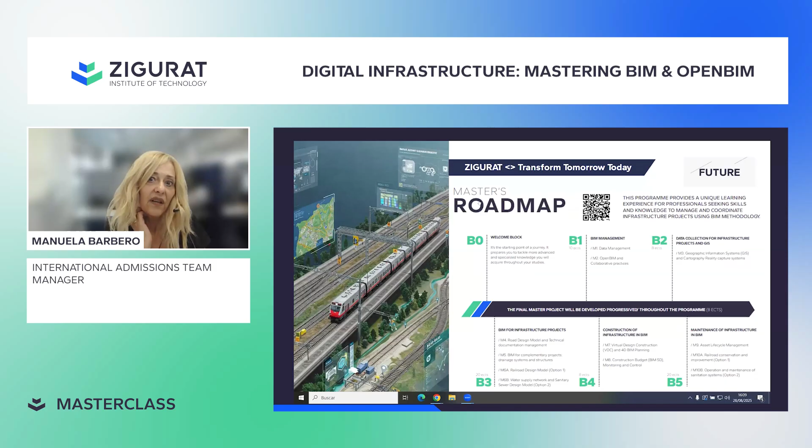In this part, we start to do virtual representation of the project, and later we'll talk better about the benefit. The last part of the master covers asset management, so we're talking about operation and maintenance. We'll check all the benefits of operation and maintenance regarding the road project and the specialization you are choosing. If you go to the next slide, we have an idea of the benefits you can get by joining this master program.

ZIGURAT is ranked as one of the top schools in the world in BIM. As Taisha told before, we started 24 years ago. In this program, we talk about BIM for Civil Engineering and GIS. We talk about cutting edge technology and knowledge because we apply new methodologies in infrastructure and GIS. We focus on data management, interoperability, and digital transformation. We talk about practical learning because we work on real projects and simulations.

This is your master final project that we will develop progressively through the entire program. Then we talk about flexibility and support. The program is structured for professional profiles, which means you can study and work at the same time. You have live online methodology, access to an advanced campus such as the Canvas platform, mentoring, and continuous academic and career support.

But you will also be involved in a global network, becoming part of the ZIGURAT alumni. You will be part of a community of more than 20,000 professionals from 120 different countries around the world. You have access to local hubs, student weeks, and executive networking.

If you go to the next slide, I'll talk about the specialization option, which is what I mentioned before. As part of the project, you can decide to add to your road project the part of water supply and sanitary sewer. So you can choose between different sectors for deeper expertise. It's career-oriented training because the program is designed to prepare you for roles such as BIM infrastructure manager, GIS consultant, head of technology, and much more.

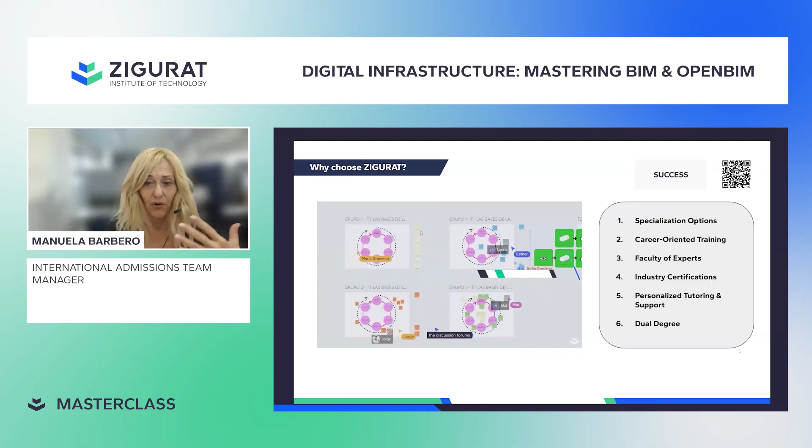It's a program that will give you a dual master degree because you can earn a double degree accredited by the University of Barcelona and ZIGURAT, recognized worldwide. Meanwhile, you will get official recognition from Autodesk and Bentley, validating technical proficiency while you use BIM tools. And as I mentioned before, now also from CIOB. Here's just an idea of what you're going to learn during the master program.

Now we give voice to two alumni who just finished the master, and they will introduce themselves. One of the two student alumni has been one of the best students, but both were part of the best project that we developed in the last edition. So congratulations to our alumni. I give them now the chance to speak better about the project, and of course, if you like, with pleasure, we will be here to provide you with more information. Thank you very much to everyone.

Thank you, Manuela. Thank you so much.

I would like to present Chakad and Dmitrii and talk a little about them before. Let me pass the presentation here. We are super proud to welcome two outstanding professionals who played a key role in the team behind the Final Master Project, awarded Best Final Master Project in the May 2024 edition of our Masters in Global BIM Management in Civil Engineering and GIS. Now it's my great pleasure to introduce our guest speakers: Dmitrii, who is a BIM Manager, Parametric Bridge Engineer, ZIGURAT alumni, and also ambassador, and Chakad, who is a land surveyor, BIM and construction management expert, and also a ZIGURAT alumni.

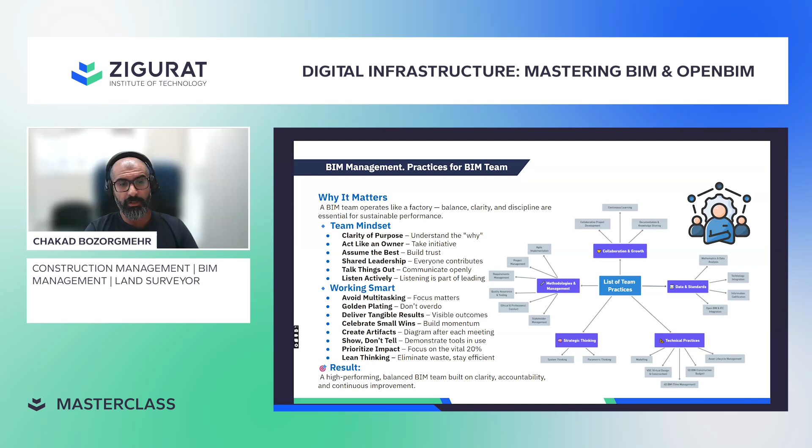Practice for BIM team. As BIM is about sharing information and managing integration, the team also needs a strong understanding of how to share and integrate efficiently. It's not just about the tools for the models, but about the people behind them. A successful BIM team builds trust, communicates openly, and takes responsibility for their role while respecting others. When everyone contributes and listens, collaboration becomes natural. Problems are solved faster, and the flow of information stays clear and reliable. This mindset is what turns BIM from a technical process into a culture of teamwork, accountability, and continuous improvement.

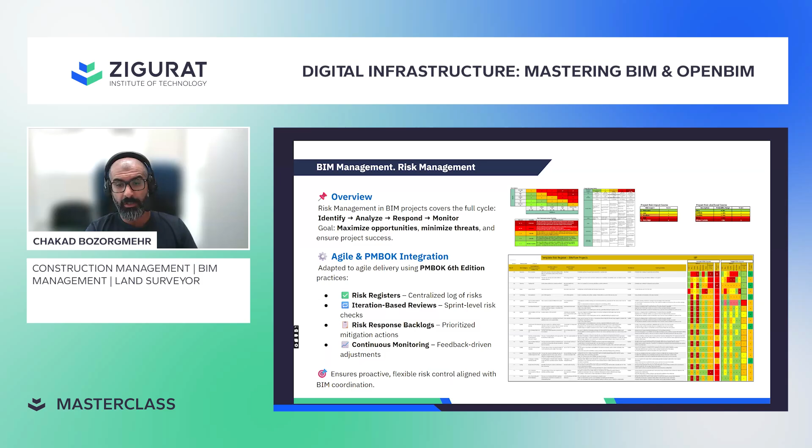Risk management. Risk management in BIM projects follows a full lifecycle of identifying, analyzing, responding to, and constantly monitoring risk. The real value here is not just documenting the risk, but also foreseeing how we should respond to them before they impact the project. As BIM methodologies and digital solutions continue to evolve rapidly, our risk management approach must adapt. This means shifting our focus not only on minimizing threats, but also on recognizing and maximizing the opportunities.

Opportunities such as automation tools or better data integration can significantly enhance project outcomes if we act on them early. In risk management, opportunities are handled with the same importance as threats, but responses focus on creating positive outcomes. We can exploit an opportunity to ensure it will happen, enhance it to increase its benefit, share it with a partner to minimize the burden, or accept it when it requires no action.

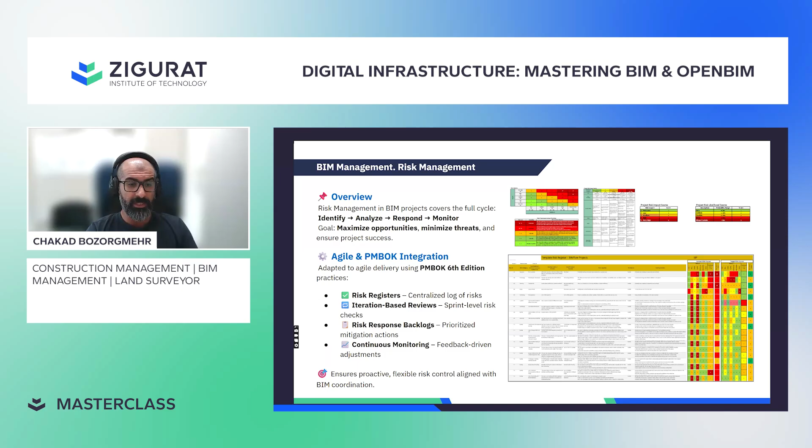Through tools like risk registers, iteration-based reviews, and continuous monitoring, we create a proactive system which ensures that risks are tracked, responses are prioritized, and adjustments are made in real time. In short, BIM risk management is not only about protecting the project from failure, but also about positioning the team to capture the opportunities that lead to greater success.

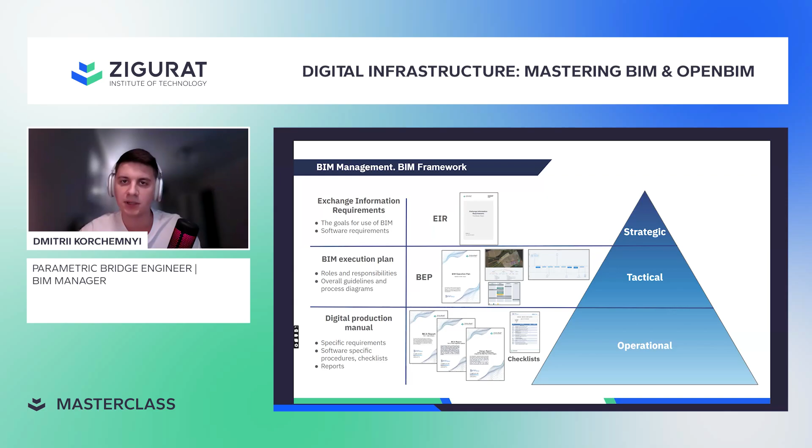And finally, at the operation level, we prepare production manuals, progress reports, and quality checklists. These tools make sure we apply BIM correctly and consistently across the project. So this structured process improves coordination, reduces mistakes, and helps us deliver the project more efficiently from start to finish.

BEP, BIM processes. BEP, BIM execution plan, is the main document in our project. It brings all team members together from the start by clearly explaining roles, tasks, workflows, and possible risks. This shared understanding helps make the project run more smoothly and saves time and money for the clients.

For our project, we created a BEP that includes all BIM uses. We created BPMN diagrams for each BIM use, clear visual diagrams that show the workflow step by step. This method supports teamwork and helps us manage risk throughout the project.

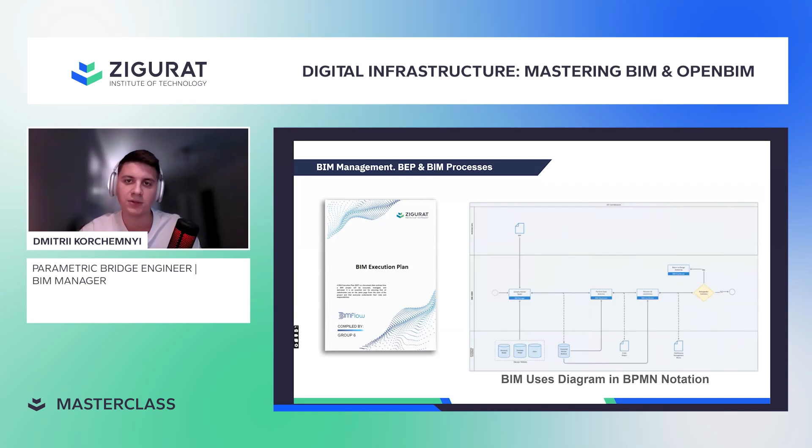GIS integration, collecting data from GIS sources. We use the top 3 GIS data sources to support accurate infrastructure planning. These datasets are reliable, up-to-date, and free, helping us make better decisions.

For our UK project, we used detailed maps from the Ordnance Survey Data Hub and the UK Government Data Portal. OpenStreetMap provides key vector data. For global use, I strongly recommend satellite images from Copernicus and terrain models like FabDem, NASADEM, SRTM, and ASTER. Together, these sources helped us create accurate maps.

Comparing data collection. From my experience generating DTMs, as shown on the slides, comparing FabDem to real land surveys reveals key accuracy points. In urban areas without large forested zones, the average difference is 0.5 to 1.5 meters. In forested areas, trees not fully removed show an average offset of 3 meters, with a maximum difference of up to 8 meters.

Another great feature is accessing online parameters via WMS, like those from the Environmental Data Government Portal, directly in QGIS. This enhances your ability to integrate real-time data into projects, supporting informed decisions.

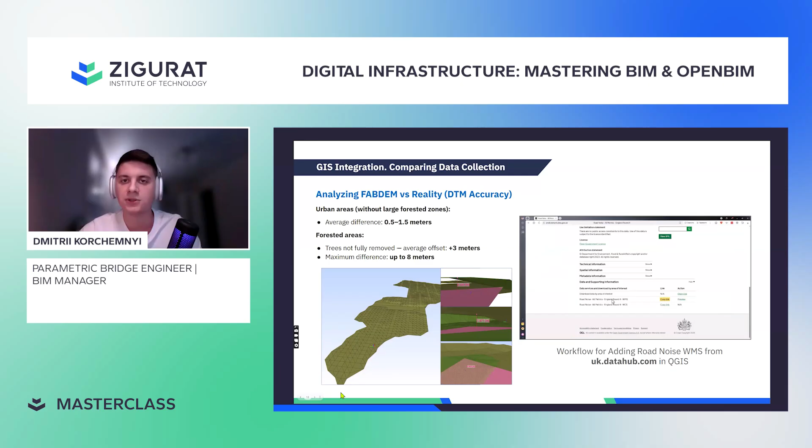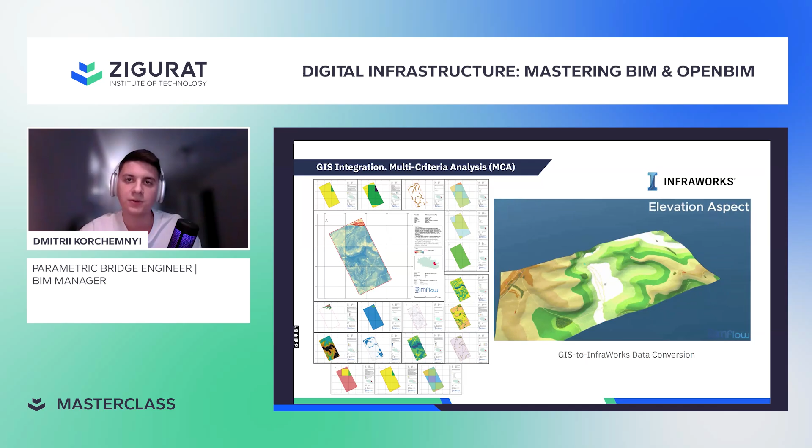Multi-criteria analysis, or MCA. Take a look at this beautiful set of maps created by our team for the first MCA site analysis. Our goal was to find the best route for the road using MCA with the Delphi method to get expert agreements. We use spatial data and modern GIS tools to plan carefully, reduce risks, and support a sustainable and cost-effective design.

Next, we brought these maps into InfraWorks, combining terrain, buildings, and environmental data into one base model. This helps us visualize the project better and supports faster, more accurate decisions.

WebGIS. In my view, one technology that really improves teamwork is WebGIS. On these slides, you can see an example using NextGIS. WebGIS lets several people access, view, and even edit maps and data online at the same time. This makes it much easier to work together, even if the team is in different places.

The main benefits are better data sharing, secure access for all project stakeholders, and real-time updates that help with faster decision making. It also works with tools like QGIS and ArcGIS, making it a strong support for planning and designing projects.

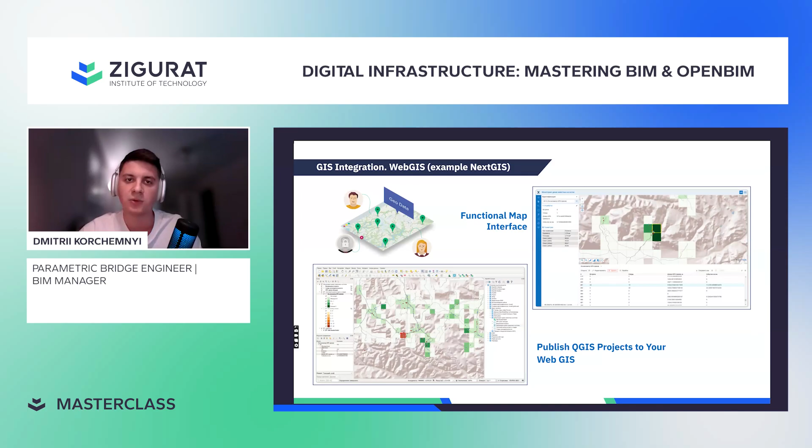Road option generation using AI. As a part of our project, we designed a road to improve connectivity between two locations, Falmer and Rodmel. We used Softree with AI alignment optimization, which automatically generates road alignments based on terrain, engineering constraints, and environmental zones.

Input data includes DTM, land use layers, restriction zones, all collected from GIS sources. This approach helped us reduce earthworks, lower the impact on the environment, and make the road design more cost-effective to build.

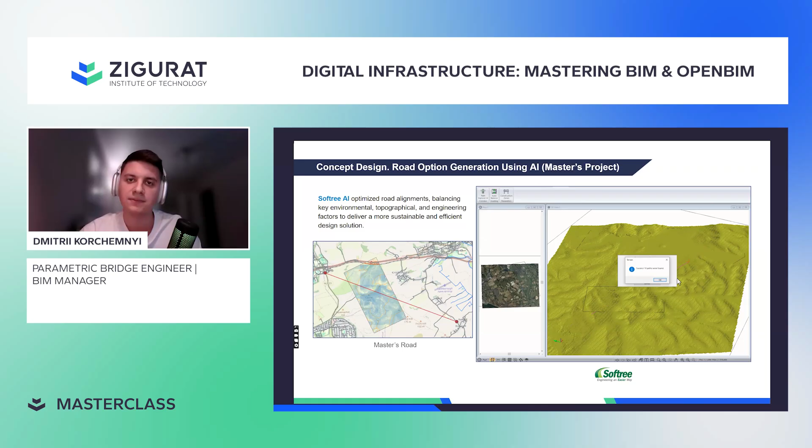Road option generation using AI. It's a case study, InfraSpace example. I want to share a new exciting tool that we didn't use in our projects, but I believe it has great potential for future design.

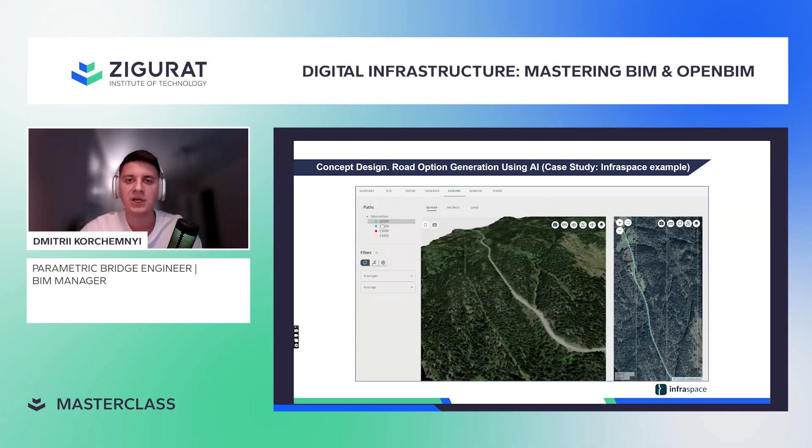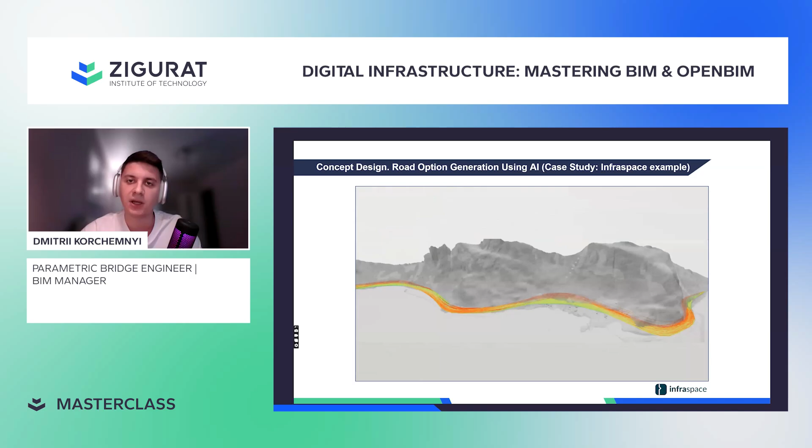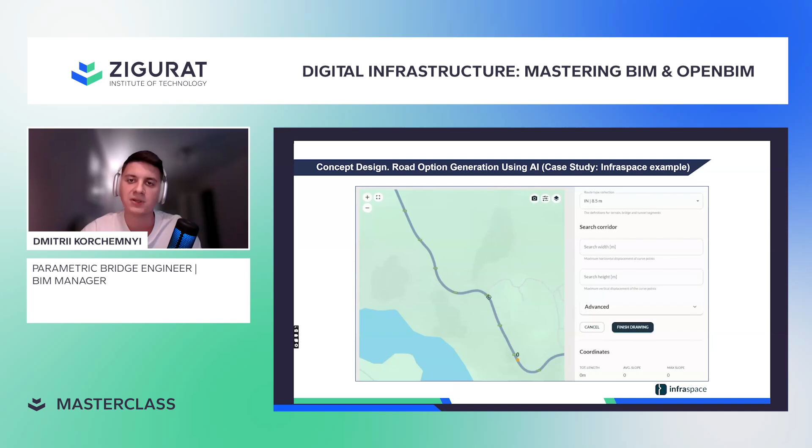It's called InfraSpace. This platform uses AI to generate many road alignment options based on cost, design rules, and GIS data. You can upload alignments, see 3D views right away, and check key results on dashboards. It helps you choose the best option for cost and environment. It works online, supports teamwork, and offers smart features like earthwork estimates, automatic 3D visuals, and optimization.

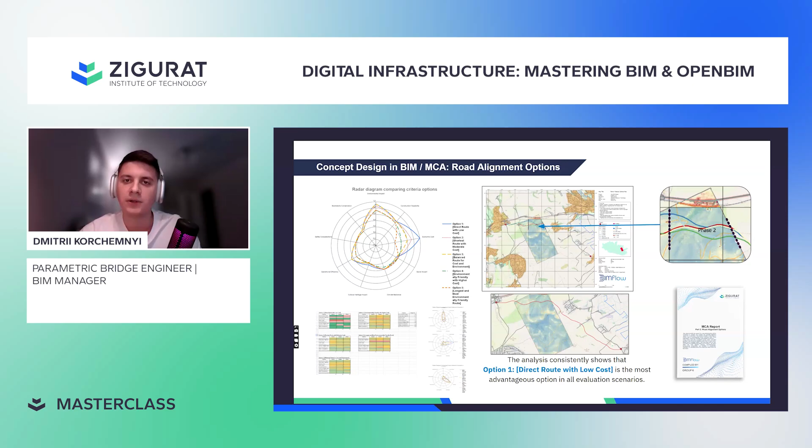The project is divided into 3 phases, and our evaluation focused specifically on phase 2, highlighted on the map. Proposal 1 includes an overpass to cross the ravine, reducing earthworks and preserving the natural landscape. The road follows the terrain closely, minimizing impacts on sensitive areas. We also prepared a cost estimate, and after reviewing the data, Proposal 1 proved to be the most cost-effective.

We built the overpass in Tekla Structures with Rhino and Grasshopper driving a parametric model. It's a prestressed concrete bridge using the balanced cantilever method. We have 2 piers, 2 abutments, and a variable depth box girder deck. Inside the deck are anchorage blocks, ducts, communication lines, and lighting.

Each pier and abutment has an access door and communication lines, and includes slope protection and approach slabs. The complex geometry is fully controlled in Grasshopper. Every key dimension is a parameter: span length, box width, web, slab thickness, and abutment offsets.

When we change one value, the whole model updates. This keeps geometry, quantities, and drawings in sync. On the BIM side, every object has a stable ID and the required property sets. We assigned unique classification and

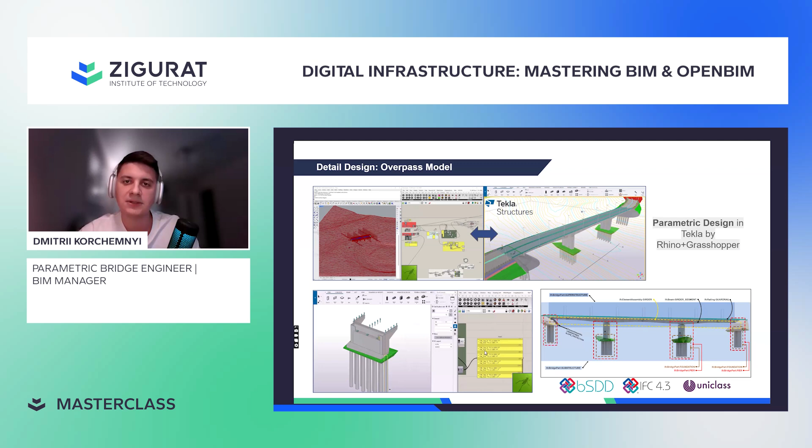So this end-to-end setup delivers consistent geometry and reliable data for digital delivery.

Road design. In road design, efficiency and accuracy are critical, and this is where Subassembly Composer and parametric design bring real value. By creating custom parametric components, we can build data-rich models that automatically adapt to changes. This allows repetitive design elements to be automated, and modifications such as changing lane width, slopes, or material can be applied instantly across the entire project.

The result is a much faster, more consistent, and more efficient design process while supporting standardization across the project. In addition, tools like Dynamo extend automation even further.

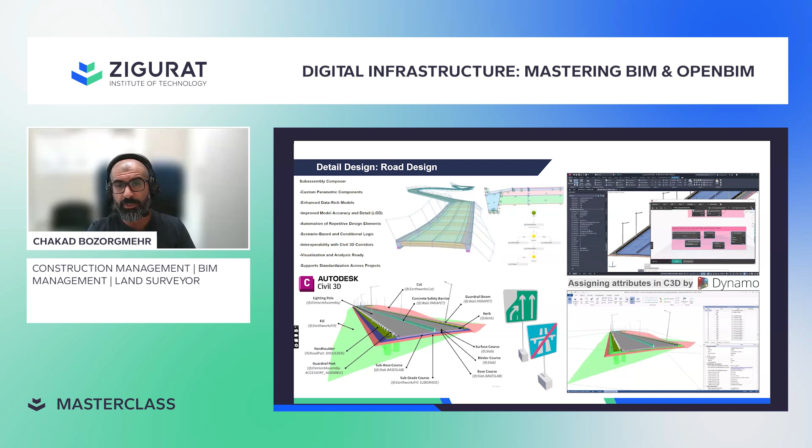Dynamo enables us to script workflows that automatically assign attributes to Civil 3D objects, such as materials, classifications, or asset information. Instead of manually editing hundreds of elements, attributes are applied in bulk based on defined rules. This not only saves time but also reduces human errors and ensures data is ready for analysis and integration.

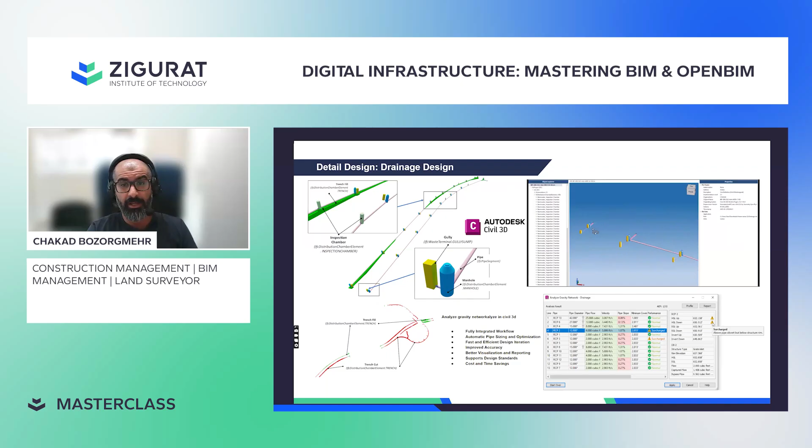Drainage. In drainage design, parametric modeling in Civil 3D allows us to create data-rich components like pipes, manholes, gullies, and inspection chambers that automatically adapt to design changes. This means that when we adjust a slope, diameter, or alignment, the entire network updates instantly, eliminating repetitive manual work and ensuring consistency across the design.

Alongside this, the Analyze Gravity Network tool brings powerful simulation capabilities into the workflow. It enables automatic pipe sizing and optimization, checks for performance issues like surcharging, and provides detailed hydraulic results such as flow, velocity, and cover performance. With these results, engineers can quickly test multiple scenarios, refine the design, and ensure compliance with standards.

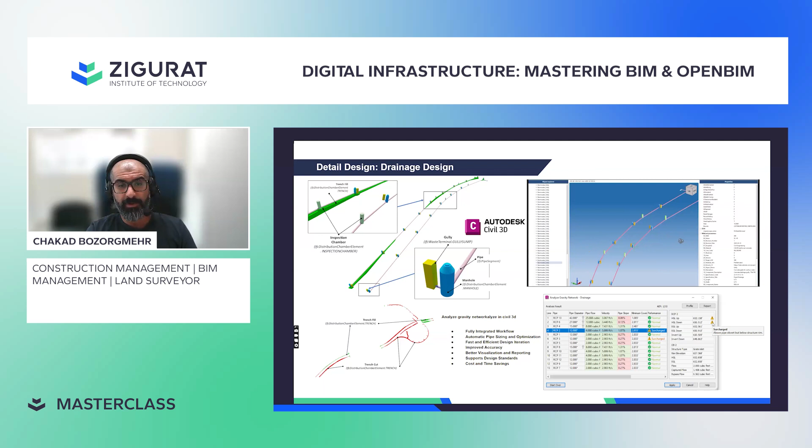Together, parametric design and network analysis make the process much faster and more reliable. They allow rapid iteration, improved accuracy, better visualization, and seamless integration with other disciplines, ultimately saving both time and cost while delivering higher quality design.

Underpass. In underpass design, we design underpasses and culverts. Underpasses and culverts were designed in Civil 3D using IFC 4.3 extension. All elements were carefully modeled with correct IFC entity assignments, along with BSDD attributes and COBie parameters to support the operation stage. This approach ensures high quality and organization, a full BIM approach, compatibility, and readiness for future asset management.

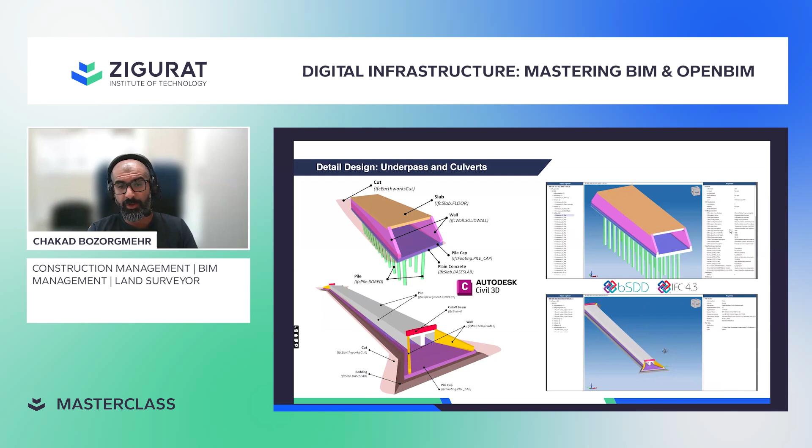Tramway. For funicular tramway design, we were inspired by Peak Tram in Hong Kong. The design includes key elements such as cable, rail track, and slab pavement, carefully modeled to meet funicular system requirements. We assign BSDD attributes and COBie parameters fully synchronized with UK standards to support future operation and ensure high-quality digital assets for long-term maintenance.

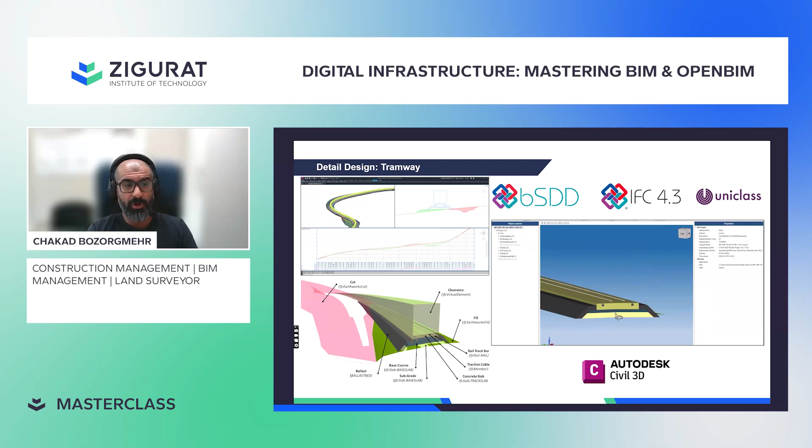Coordination. Effective coordination is one of the biggest advantages of combining platforms like Navisworks with common data environments such as Catenda Hub. Navisworks allows us to run powerful clash detection, identifying conflicts between disciplines early in the design phase, such as drainage colliding with a structure or a utility. Such clash can then be documented, tracked, and assigned directly to an issue.

By integrating a CDE, these issues don't just stay in the model, they become part of a structured workflow. Catenda Hub ensures that every issue is logged, assigned to a responsible team, given a status, and monitored until it's resolved.

This creates full traceability, reduces communication gaps, and avoids costly rework during construction. This coordination routine can be carried out in many aspects, including geometry coordination, data and information coordination, interdisciplinary coordination, constructability and safety coordination, and so on.

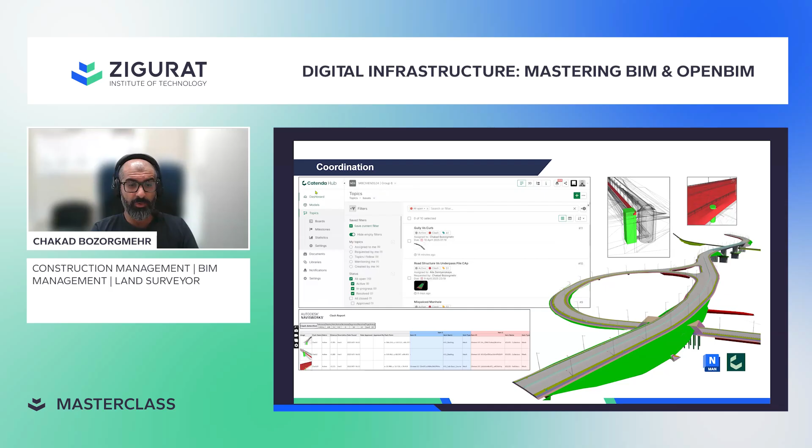Together, Navisworks and a CDE like Catenda Hub create a seamless loop: detect issues, assign them as an issue, and solve them within the project data environment. The result is smoother collaboration, fewer errors, and more efficient project delivery.

IDS checker. We check our IFC models against the project rules using IDS. First, we turn the client's exchange requirements into machine-readable IDS rules in IDS Maker. We set simple checks: which entities, which properties and data types, and the allowed formats. Next, we export the IDS file.

In the Blender BIM Bonsai plugin, we load the IFC, load the IDS, and run validation. Bonsai creates an HTML report with pass or fail for each rule and each element by global ID, and it shows any missing or wrong values.

This workflow follows ISO guidelines. It gives us consistent, complete data, reduces rework, and makes data exchange between clients, models, and software reliable.

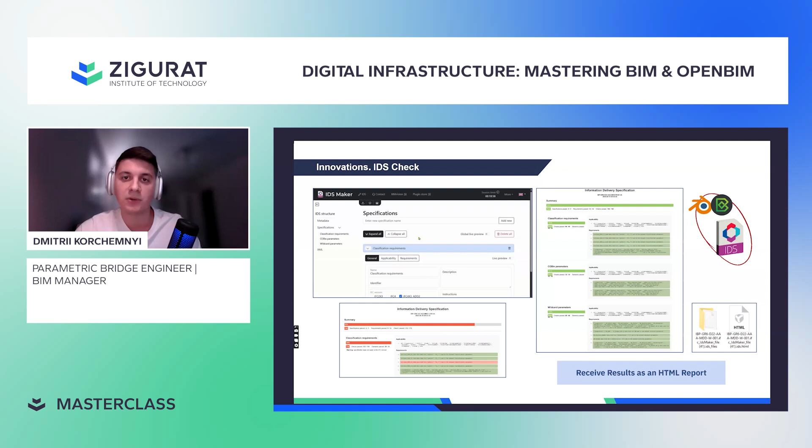IFC to Excel. Another helpful tool is the DDC IFC converter. It's free, simple, and works fully offline. It converts IFC files from IFC2x3 to IFC4x3 into Excel and DWG formats.

This workflow is easy: select your IFC, choose Excel or DWG format, and click convert. The Excel file lists every element as a row with its global ID. Columns show the key data: entity type, name, materials, main dimensions, etc.

This makes reviews and checks faster, supports QTO, and lets you link model data to Power BI or project dashboards without extra plugins and software. In short, it's a light but powerful way to turn IFC models into clear, usable data, saving time and making your BIM work more efficient.

Automation in AEC. Let me introduce n8n, a free open source automation tool. You don't need to code, just drag and drop blocks like in Dynamo or Grasshopper. It's zero coding. It connects more than 500 applications: Google Calendar, Microsoft Teams, OneDrive, and more.

It can send emails, move files, call APIs, and add AI steps. You can run it on your laptop or your own server, so you keep control of your data and customize it. In the AEC industry, common uses are QTO reports, syncing model data to dashboards, and automating model checks.

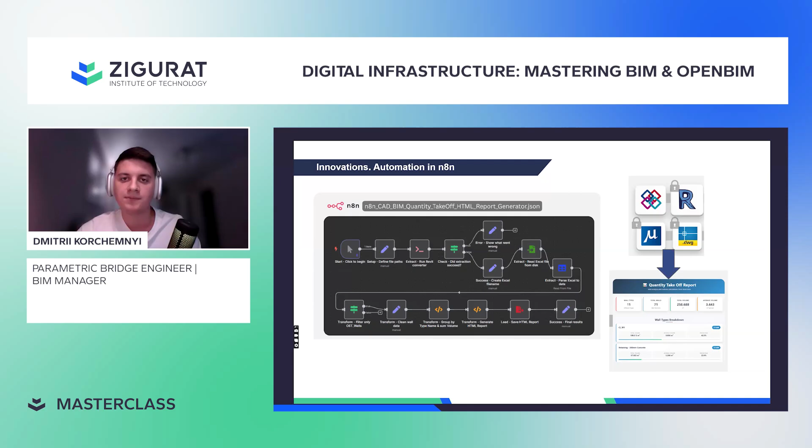Augmented reality helps AEC teams see designs at full scale and make faster decisions. For this project, we used IFC-XR to run quick immersive reviews. The workflow is simple: export the IFC, upload, and open in AR.

In minutes, we can find spatial conflicts. We capture screenshots and short notes and share them with the team. The result: fewer misunderstandings and clearer decisions for clients.

In other innovations, Trimble AR brings the model to the field. We load the model from Trimble Connect, align it to site control markers, and see a precise overlay on the real environment. Teams verify layouts, slab edges, openings, and embed locations before installation.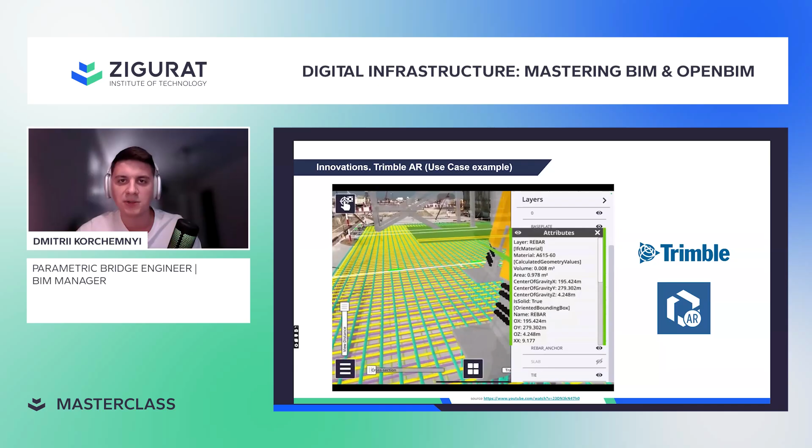If something does not match, they flag it on the spot with a photo and comment, then sync back to the office. This reduces errors, RFIs, and rework, and improves communication between field and design teams. For complex projects, Trimble AR helps check progress in real time and make confident, data-based decisions.

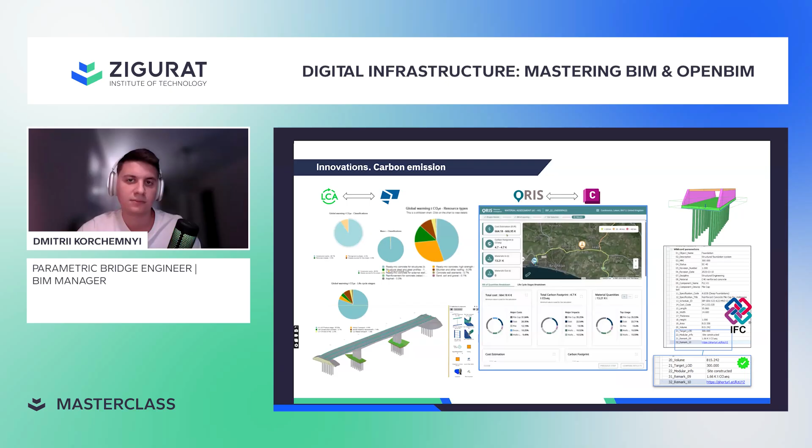Carbon emission. There are many innovations in the industry to help us with different aspects. Among them, carbon emission estimation solutions help us design and build more sustainably. For example, the LCA plugin uses AI to quickly generate carbon footprint values during the design stage, making it suitable for early comparison and decision making when exploring different design options.

It provides a fast, data-driven way to estimate emission and evaluate alternatives. On the other hand, the ORIS plugin is more focused on the construction phase. It calculates emission based on real material suppliers like asphalt or concrete plants and their distances from the project site. This allows more precise results, factoring in transportation and the actual supply chain. Both plugins receive the geometry features from the model and have the ability to insert the estimated carbon emission quantities back into the model geometry.

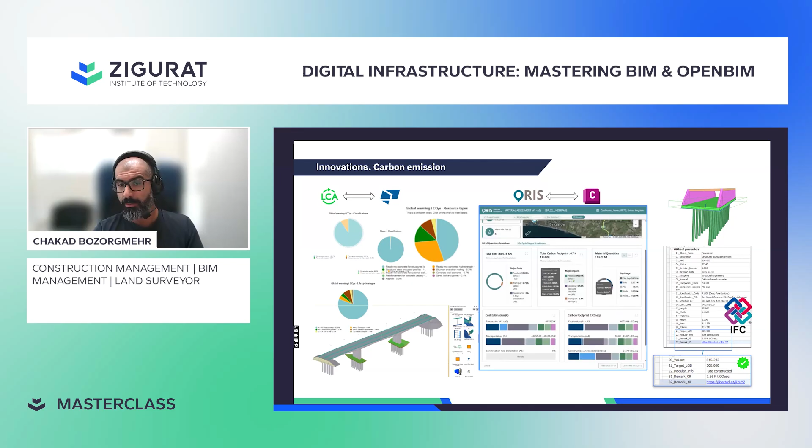Together, LCA and ORIS provide a full picture approach. LCA supports early design choices, while ORIS refines the calculations for execution, helping us minimize carbon impact across the project lifecycle.

Site management. In the construction phase, platforms like Leica ConX play a crucial role in integrating and controlling heavy machinery and earthworks. By connecting excavators, graders, and other equipment directly to the digital model, ConX allows real-time tracking of machine positions, tasks, and progress. Operators receive precise design data in their cabs, which improves accuracy and reduces the need for manual staking.

For project managers, the platform provides a live overview of productivity, material movement, and compliance with design tolerances. This not only minimizes rework and waste, but also supports better decision-making and coordination across the site. In short, Leica ConX creates a direct link between the digital model and physical construction, ensuring greater efficiency, cost saving, and quality in earthwork operations.

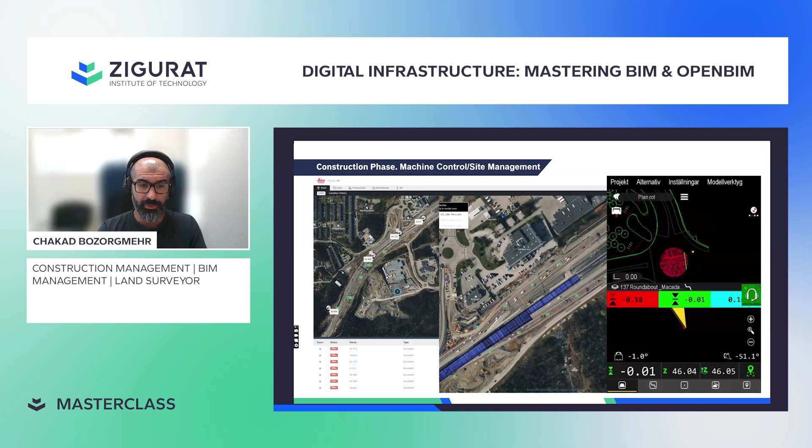4D simulation. 4D simulation adds significant value during the construction phase. One of the key benefits comes from assigning detailed attributes to every model element. These attributes allow elements to be automatically matched to the corresponding task in the construction schedule, which saves time, reduces risk of human error, and ensures consistency across the project.

By linking the 3D model with the project timeline, 4D simulation gives us a dynamic view of how construction will progress. It helps us identify clashes in sequencing, anticipate resources, and optimize site logistics. The team can clearly see when and where activities will occur, which improves coordination and communication between stakeholders.

Overall, 4D simulation enhances predictability, reduces delay, and provides a transparent roadmap for the construction process. This not only supports more efficient planning and execution, but also builds the confidence that the project will be delivered on time with fewer risks.

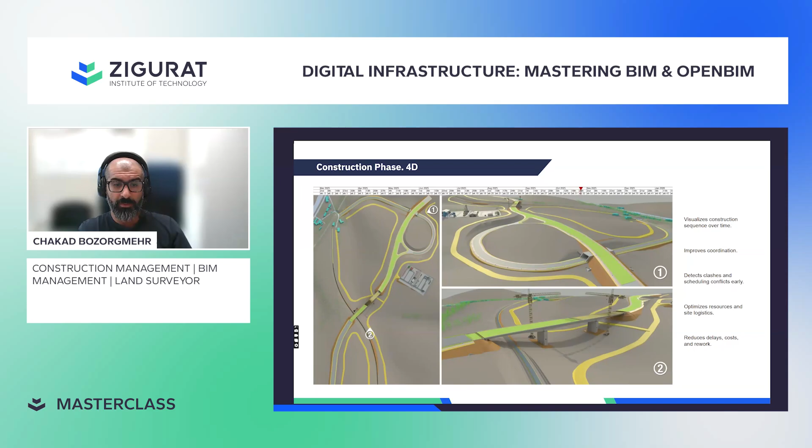5D. In 5D modeling, cost data is integrated directly in the 3D model. By assigning codes like CSI or ICMS to each element, quantities can be automatically extracted and linked to the pricing database or cost estimation tools. This eliminates repetitive manual takeoffs, ensures accuracy, and allows instant updates whenever a design change occurs.

We assign cost codes to each model element, so it directly links design with cost. The geometry provides quantities like length, area, or volume, and the cost code connects those quantities to a unit rate in the cost database. For example, a concrete wall modeled in 3D carries its cost code, which pulls the right rate and calculates total cost automatically in the 5D software platform.

When the model changes, quantities and costs update instantly. This creates a live, accurate cost plan and ties design, schedule, and budget together. Overall, 5D BIM supports better decision making, reduces financial risk, and improves efficiency by integrating design, time, and cost into one streamlined workflow.

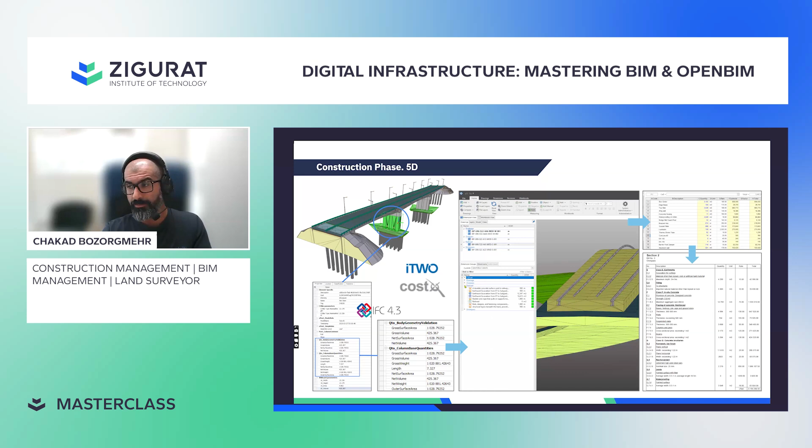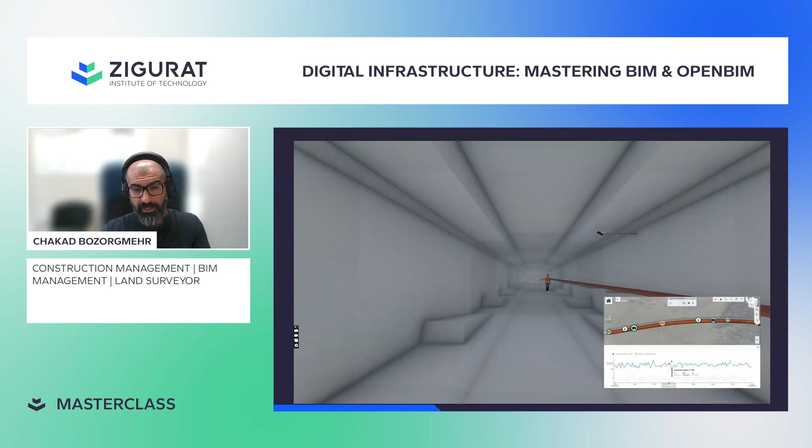Asset management. BIM plays a vital role in asset management by providing a digital twin of the facility that stores accurate, up-to-date information about components. It works by integrating data from design, construction, and operation into one connected model. Sensors, IoT devices, and maintenance systems feed real-time data into the twin, so managers can monitor performance, predict failure, and optimize the cost lifecycle.